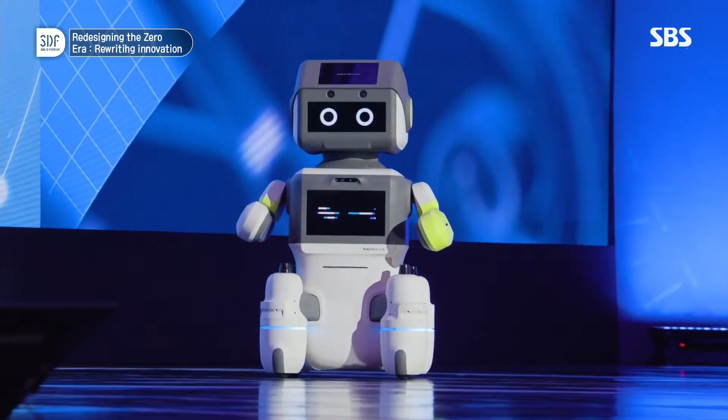Wow, we have a robot, not Mr. Hyun. I think I know who this is. It's called DAL-E, a service robot developed by the Hyundai Robotics Lab. Hi, I am DAL-E, the mascot of Hyundai Motor Group's Robotics Lab.

It is very cold outside. How was your way to here? Now, let me introduce the person who has made me and created me. Mr. Hyun Dong-jin is Executive Vice President of Hyundai Motor Group's Robotics Lab, and he oversees the entire Robotics Lab. And he will be making the presentation today on the topic of expansion of robotics for humanity.

Thank you for introducing me, DAL-E. Do you want to introduce yourself, DAL-E? Yes. Hi, I was born in the robotics lab at the Uiwang Research Center, and currently I work at Hyundai and Kia dealership site to greet our customers visiting the showroom. Nice to meet you. Yes, DAL-E, how does it feel to be on the stage? Well, I'm a little nervous to be here in a new place, meeting so many new people, but I'm also excited.

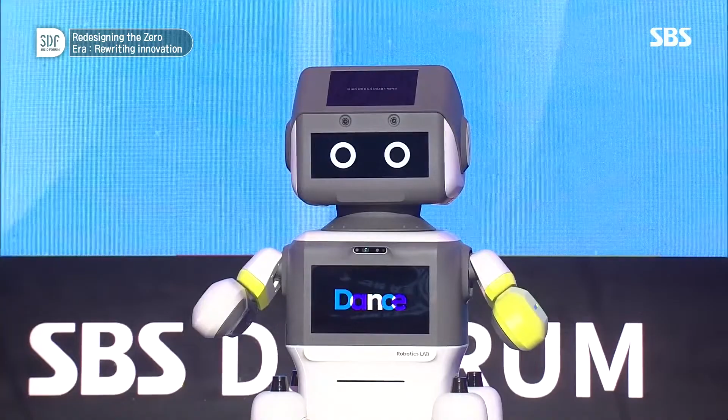So DAL-E, I know that you dance at the dealership to entertain kids. So can you show that dance for us as well? Yes, I will go to the center of the stage. Do you have any questions? Well, let me dance for you. So please step back so that I would not bump into you.

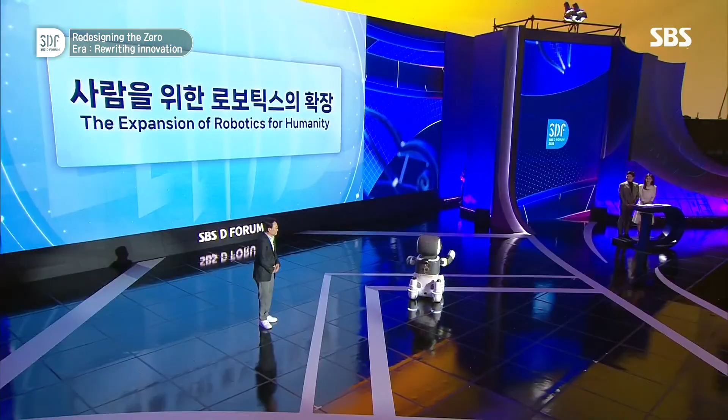Thank you. So I hope to see you again. Please welcome Mr. Hyun Dong-jin from Robotics Lab of Hyundai Motors Group.

So you can see the interaction between human and robots. 5 years ago, we developed this service robot DAL-E. Hello, nice to meet you. I am Vice President of Hyundai Motor Group's Robotics Lab. My name is Hyun Dong-jin. Today, I will talk about how in this human society, we can have not just simple robot products, but have robotics technology to bring changes in our everyday life.

And it's like an innovation, and this innovation can make our lives more convenient, safer, and more productive. So this is what I call the temperature of technology. You probably all know the term robot or robotics, and I think they are two different terms. Robot is a finished product, but robotics is a fusion of disciplines combining mechanical engineering, electronics, computer science, mathematics, and design.

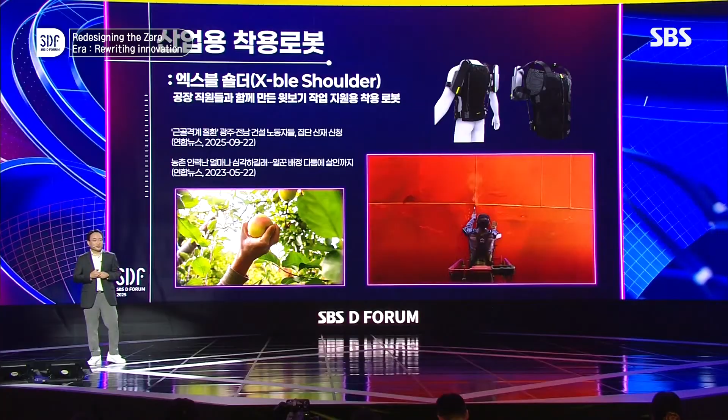First, let's look into the labor market, where aging is a big burden. Now we have X-ble Shoulder, a wearable robot for industrial operation. It's like a muscle that can be worn by workers to protect their body and muscles. In our workplace there are many challenges, and physical harm or injury is one of the main issues, not just at industrial sites but also at factories and farms. This wearable robot can be an answer. At Hyundai, we are expanding it not just from our factory but also into aviation and farming industries. I believe the wearable robot could be the future answer.

Next is using the electric motor to provide rehabilitation support for people suffering from paralysis or other mobility issues. In medical settings, the demand for rehabilitation is rising and we have an aging population, but physical therapists are still in short supply. So at Robotics Lab, we are working together with the Seoul Asan Medical Center, the National Rehabilitation Center, and the Armed Forces Hospital to expand the use of this rehabilitation robot.

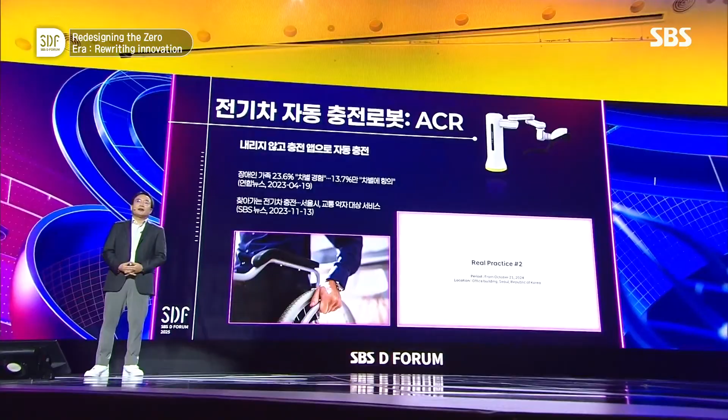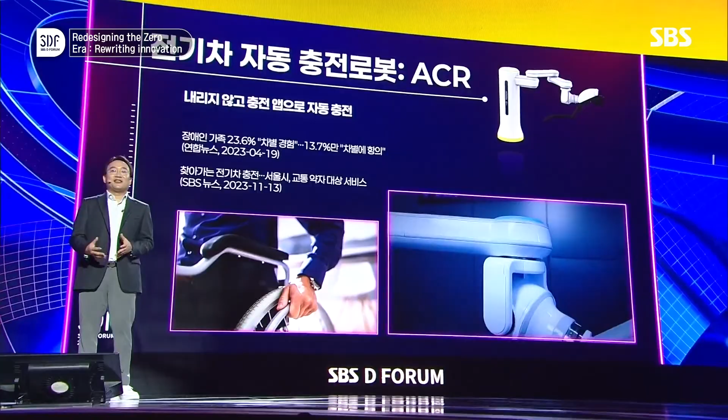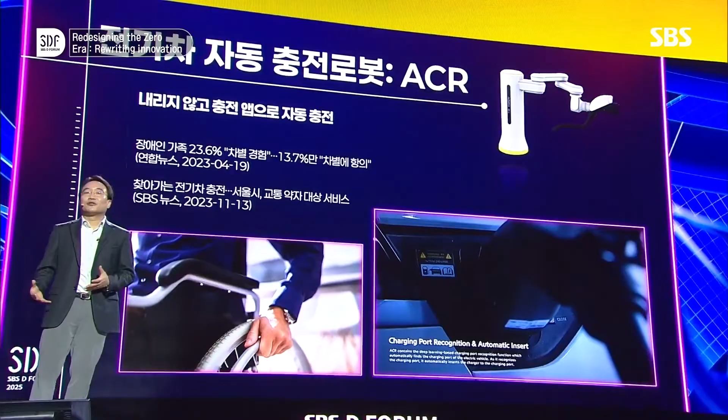Next is the automatic charging robot, ACR, that allows people to charge their EVs without getting off the car. This ACR is not just for EV charging, but the same theory can be used for hydrogen vehicle refueling. For elderly people or those with mobility issues, we can provide ACR support to safely recognize the charging port and connect the heavy cable automatically to the car, so we can have a barrier-free experience in the EV era. In aviation, the same technology can be applied, helping staff connect heavy electric cables used to power aircraft engines before takeoff. I believe there can be many applications using these robots for safety, convenience, and also reducing fuel consumption.

Now, autonomous robotics are going beyond just factories and warehouses, and they are coming into our everyday life. With advanced hardware, spatial awareness, and infrastructure collaboration technologies, robots can ride elevators, open doors, and navigate through complex human environments. This mobility autonomous driving, together with collaboration with delivery companies, enables automated last-mile delivery, and we can respond to the delivery labor shortage issue and reduce logistics burdens, for example for elderly caregivers supporting their parents.

What about AI-based security and surveillance? Using cameras, robots can monitor equipment, facilities, and people, and a cloud-based control system can allow remote updates and real-time streaming of video. AI CCTV, facial recognition access control, and safety management systems, which have so far been static, will now become dynamic. With stable, consistent, and accurate safety data, we can send robots into hazardous environments to protect people.

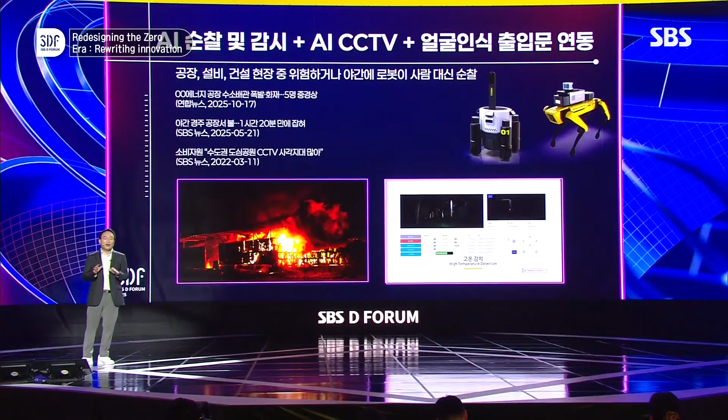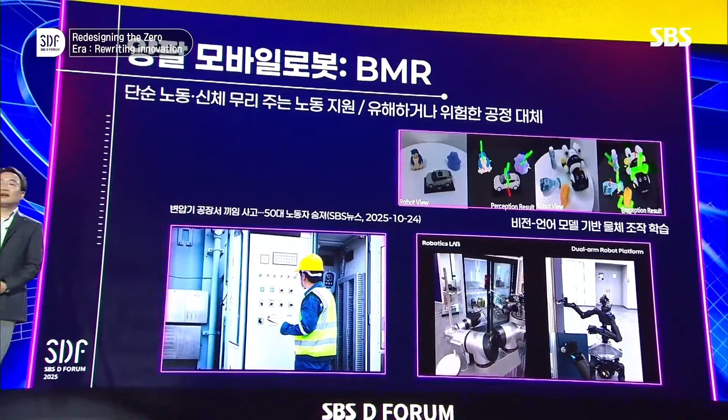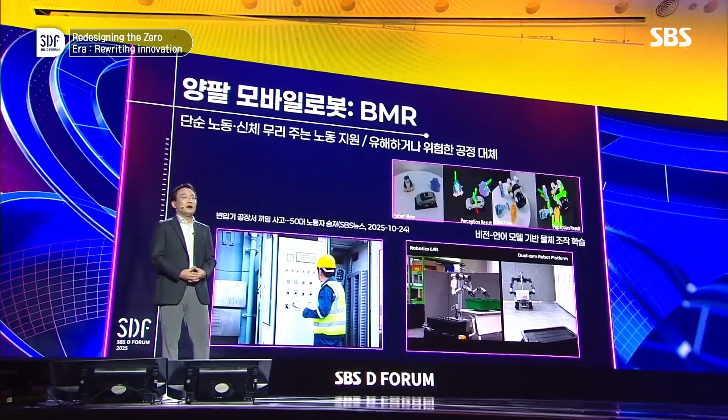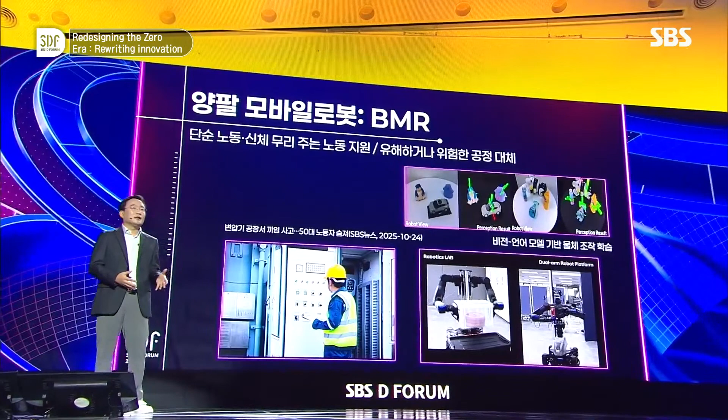In areas where people cannot access, robots can go into those places and perform jobs on behalf of people. Repetitive work that can harm the body will be performed by robotics, so the dual-arm robot can perform that on behalf of people. Instead, people can just perform the role of maintenance and oversight. Through this, people can be freed from work that can harm their body or life, and without needing to go to hazardous locations, they can still monitor and control things on site. Things might be happening slower than expected, but still in the most dangerous and trickiest sites, we are providing these services. Through continuous progress in cognitive AI, reinforcement learning, and imitation learning, we will create more productive and safer workplaces.

Furthermore, all the technologies I have shared today will be converged in one location to provide the robotization of space. This means at Robotics Lab we provide facial recognition for entry, autonomous delivery of food and parcels. All of those will be connected so that we will have a robotics-friendly building. At Factorial Seongsu, we have been doing this project since 2024, and we are planning to expand this model to office buildings, department stores, and elderly care locations as well.

But to have this application, there are some prerequisites. First, we must continuously create reasons for customers to use this robotics service. We need quality product, certification, maintenance, and performance all validated so customers will be open to use this service. We also need customers to understand and accept and embrace this new service. Second, we need to provide robotics products at affordable prices, through standardization, modularization, and remanufacturing, enhancing value while reducing costs. To fulfill both prerequisites, we are expanding our supply chain and our service and sales network so we can lead the new ecosystem.